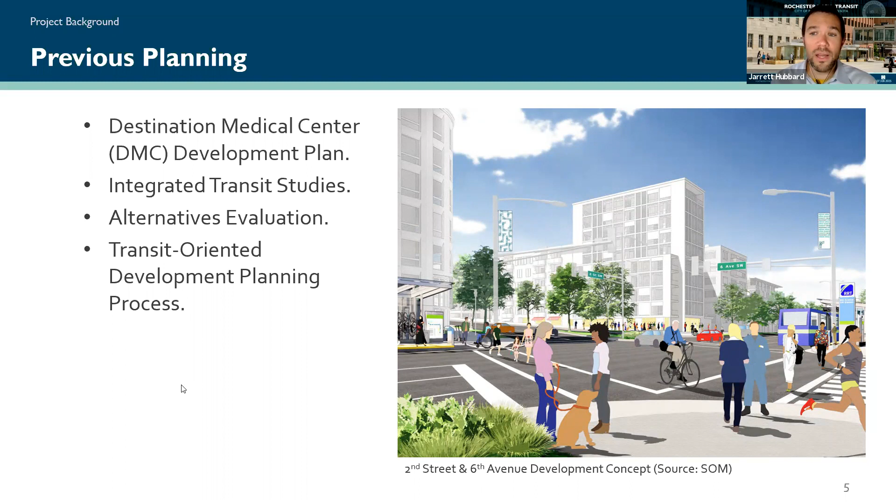With that, we'll move along to the project background. As I've already stated a little bit, Rochester Downtown Rapid Transit, or what was formerly known as the Circulator, has been a concept discussed within the community for almost a decade now. But it wasn't until the Destination Medical Center Development Plan in 2015 that the concept really started to grow and develop into a real idea, a real concept. With that plan, the city and Destination Medical Center started the process of really looking into the project and the idea. And in the last few years, we've done several additional studies and outreach, as you can see there on the screen, that led us to this point of bus rapid transit.

Some of you might be asking: these numbers were prepared a few years ago when we were showing growth and development in the community. Has the project and the city started to take a look at revising these numbers for the current pandemic we're going through and the resulting economic downturn? The answer is yes. We are closely monitoring the situation. We have open communications between the city and many of the downtown employers about what the future may hold. At the same time, we are closely monitoring not only effects in Rochester transit, but effects across the world on transit with the pandemic. So we are closely monitoring those ideas. I can say some of our transit numbers have started to rebound slightly since March, but they're still not what they were, say, this time last year.

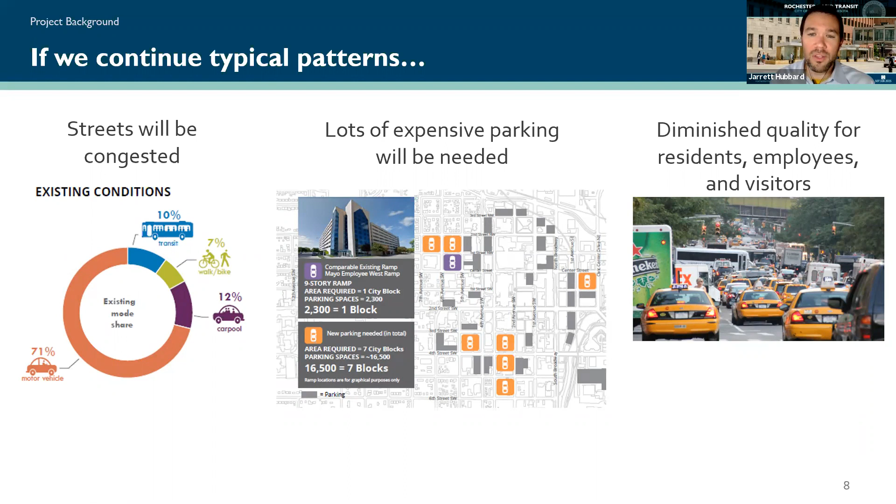And then finally, with all those additional employees and residents downtown, the streets themselves—we only have a select number of streets that come downtown, and we cannot expand those streets or add additional lanes. So it's going to be tough with all those additional people if we don't try to figure out alternatives to everyone continuing to drive their own personal car downtown.

That has resulted in what's known as the downtown, or the city's, mode share target. Back in 2015, roughly 70% of people coming downtown were using their own personal vehicles, and only about 10% were on transit. The goal is by 2035, 2040, we would adjust these numbers and grow the number of people using transit to come downtown up to, if not near, 30%. Besides growing transit, we also hope to grow walking, biking, carpooling, and ride sharing to help minimize and reduce the number of cars coming to downtown.

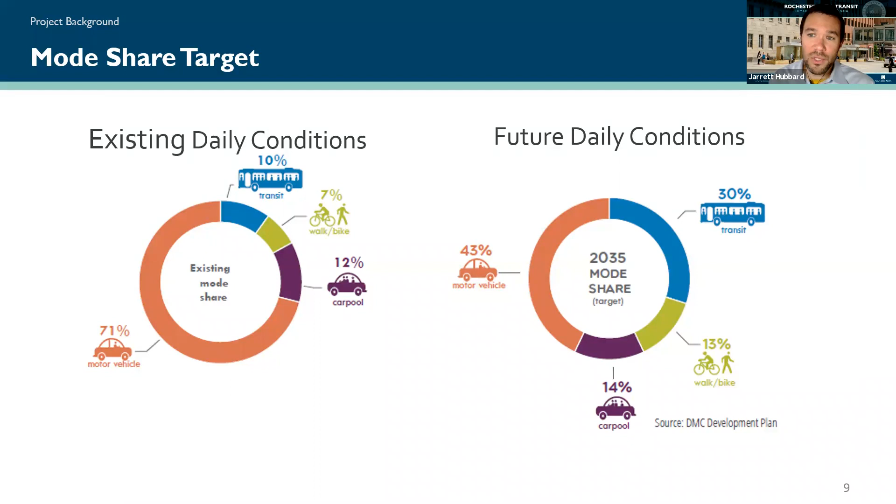So the purpose, one big overall goal, is we want to provide high quality downtown transportation for residents, commuters, businesses, patients, students, and all visitors. We want to support the economic and livability goals of the city and Destination Medical Center. And as you just saw with the mode shift and the targets, increase the number of people riding transit and not utilizing their own vehicles coming downtown.

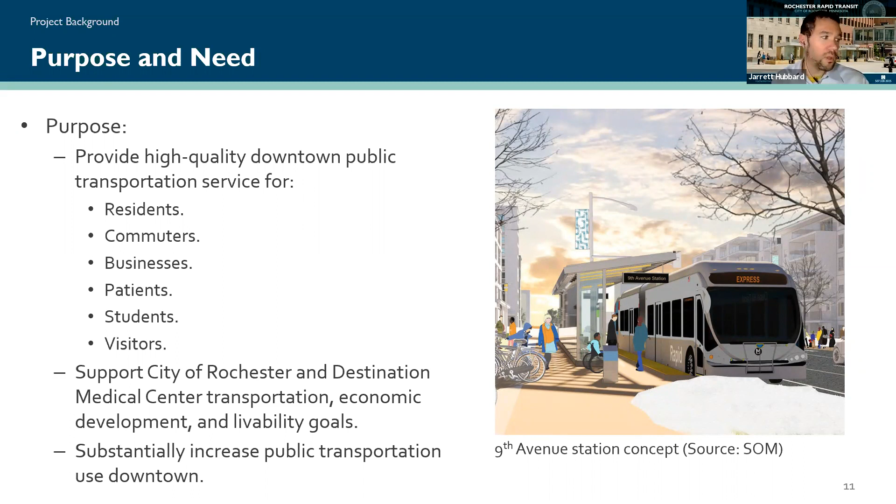So why do we need this? Once again, this repeats that local and regional travel is associated with trying to grow the goals, to accommodate those goals of the DMC development plan. We want to enhance the network and the economic development priorities of downtown. We want to mitigate the congestion ideas and concepts growing in downtown that we talked about earlier, and once again, increase transit capacity for the overall network.

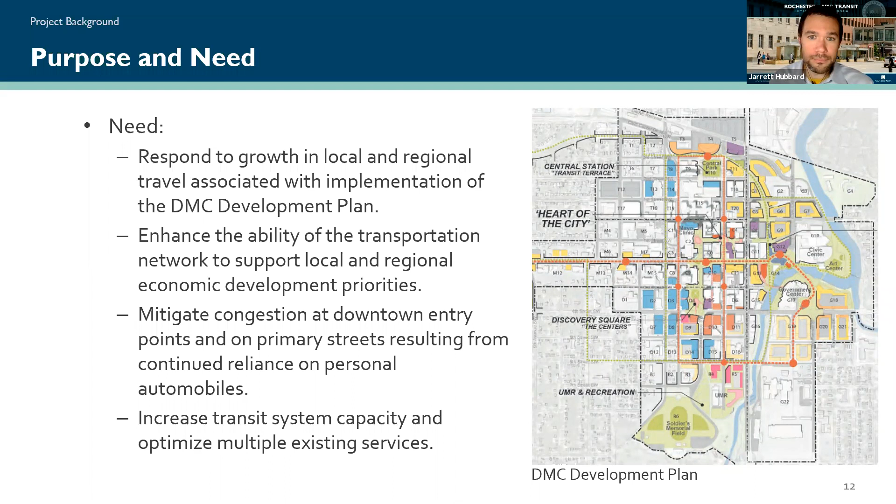More goals: increase transit use among residents, employees, and visitors. We want to use transit to catalyze the existing and future development in downtown to help support the livability and economic goals we previously discussed. We want to plan a cost-effective transit way to help make sure we can move that many people quickly, and finally support the sustainability and active living goals that the community has as well.

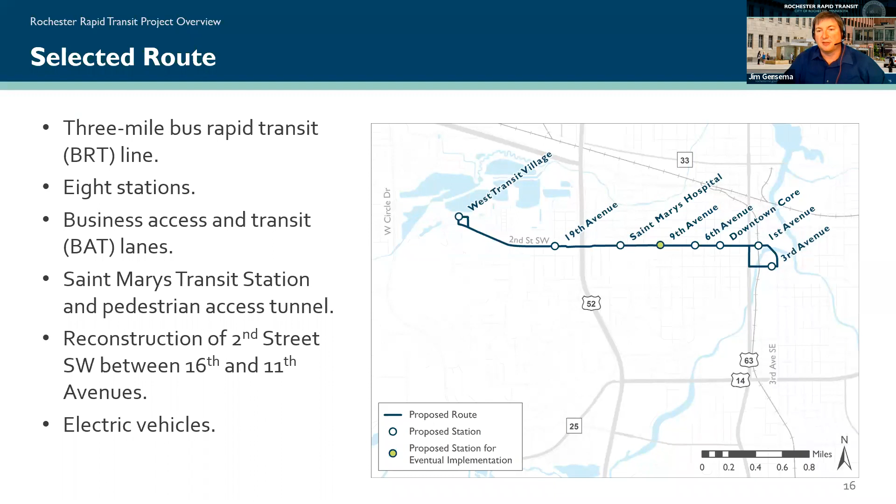This project also will complete that reconstruction of 2nd Street, with that section between 16th and 11th Avenues. And the rapid transit project will include use of electric buses as part of that fleet for this service.

By the numbers, the rapid transit project will operate every 5 minutes in the peak hours. That'd be in the morning between 6 and 9, and in the afternoon between 3 and 6. Outside of those hours, it'll be operating every 10 minutes.

With that type of frequency, you don't need to look at your schedule and route map. When you're using this type of service, you can watch the platform and know that very quickly a bus will be there. It takes less than 15 minutes to get from one end of the route to the other, so 15 minutes between West Transit Village and the government center.

We anticipate that on the opening day, opening year service will have roughly 11,000 transit riders a day. This will operate during the weekdays between 5 in the morning and 11 at night, and on the weekends between 8 in the morning and 11 at night.

One of the benefits of BRT and the proposed BAT lanes is that it provides the opportunity for those higher occupancy buses to get through the corridor more efficiently. That provides more capacity in the existing corridor, enhanced movement through the corridor for more people, and provides more options for people that might not have a personal vehicle. This also allows parts of downtown that might be surface parking today to transition into higher density uses to facilitate that growth in downtown.

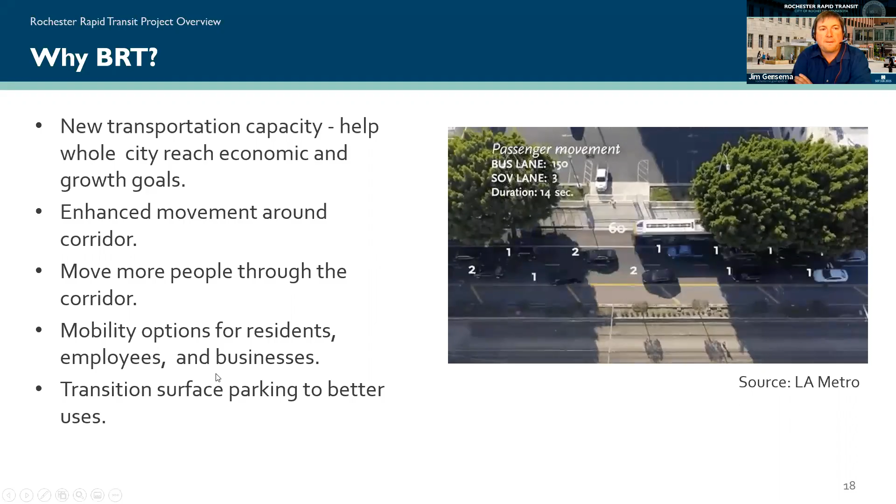So a little bit more about what bus rapid transit is, or BRT. This is a high quality service that's very similar to light rail transit or modern streetcar. It operates its own facility, in this case that BAT lane. It has that high frequency, either every 5 minutes or every 10 minutes, so you have that sense of reliability that's going to be there.

The stations that'll be placed in the corridor are more than just bus stops, more than a sign in the ground. These are established locations with a lot of amenities. This is the right size solution for this project. The buses being looked at are 60 feet long. They have the capacity to handle that anticipated ridership with the type of frequency we're talking about, and can be implemented less costly than other types of rail service.

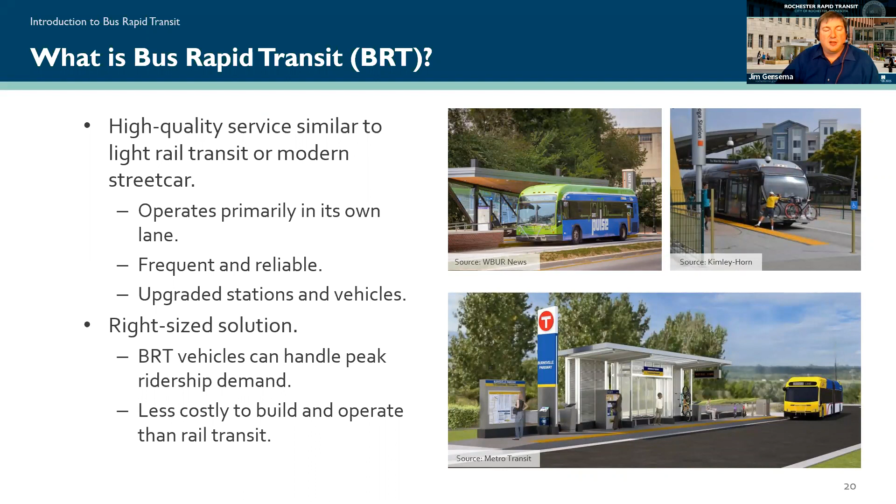These buses can operate in the existing lanes, existing pavement that's out there today. The stations and amenities contain, in our situation, a shelter that's going to have a roof over the head. They're going to be well lit, with options for fare collection on the platform, so you don't have to pay your fare on the bus and can board more quickly. It's going to provide additional rider information, seating and bicycle parking, and a warning strip along the curb so you understand where the edge of the platform is and where that bus will be boarding.

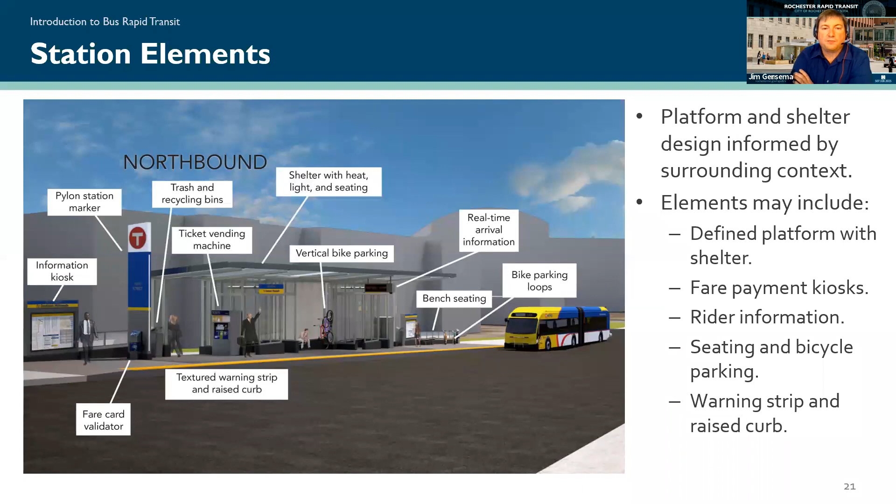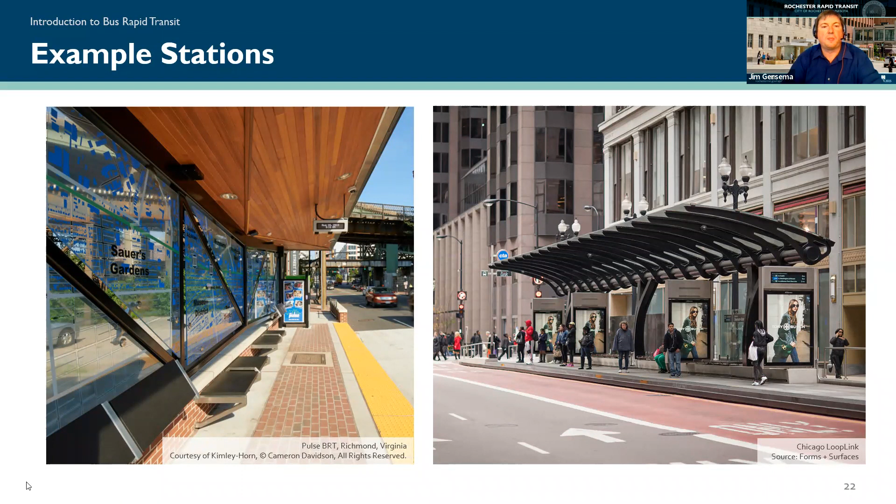Within the corridor, there are some parameters we're looking at, being that we are looking to operate this within the existing right-of-way and the constraints of how the corridor looks today. We're looking to meet standards for pedestrians and multimodal features, maintain business and resident access, and incorporate streetscape elements into the corridor where appropriate.

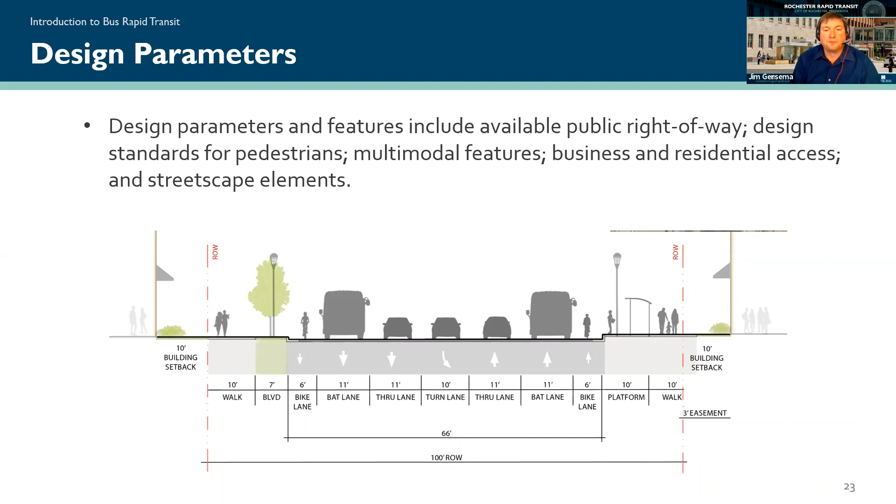Hi, as a person with multiple sclerosis, though I'm not currently using a wheelchair, I do use walkers and other things. I noticed on the Chicago slide there didn't seem to be any place for wheelchair seating to be in and covered. On the left-hand slide, I wasn't sure if those fixed down benches and some flipped up looking benches were intended for wheelchairs. I was downtown at the bus stops across from the Mayo Clinic not too long ago and was measuring them, and they don't fit wheelchairs in them. So are you considering that aspect of the bus shelters? And are you going to use solar to heat it or what?

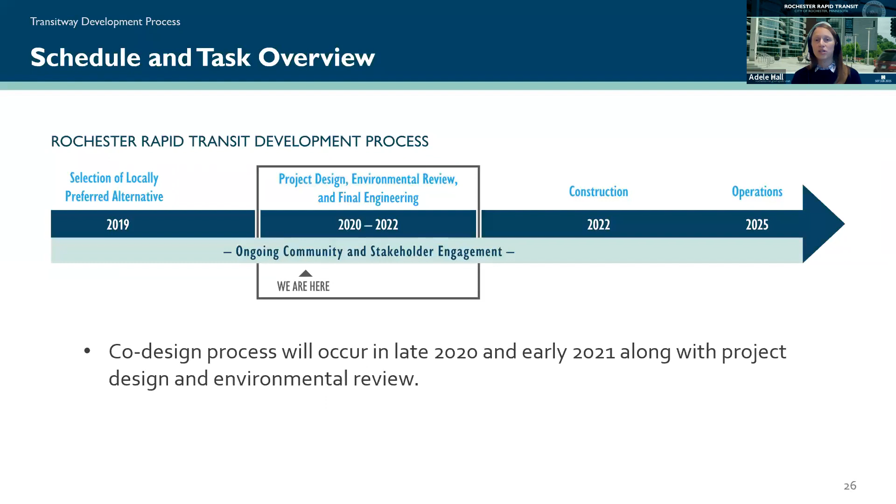There's a note on this slide about the co-design process—I'll get into that in more detail on the coming slides. That timeline highlighted design and environmental review, and we wanted to pull apart those two efforts to let you know what to expect within each.

Does it include indoor climate-controlled space? Does it include semi-enclosed space? What are the real-time signage features? What does the fare collection system look like? Are there benches or other types of seating? Are there trash receptacles? Is there bike parking, and what does it look like? All of those are questions we are answering through the design process relative to the station platform itself.

Those are the decisions that our co-design team is really involved in. Some of you may be familiar with co-design—if not, the city recently reached out and solicited applications from Rochester residents who are interested in being involved in the rapid transit project and connected in their communities, asking them to join the project team over the course of the next 9 or so months through next spring, and get involved in the decisions that shape the station architecture and design.

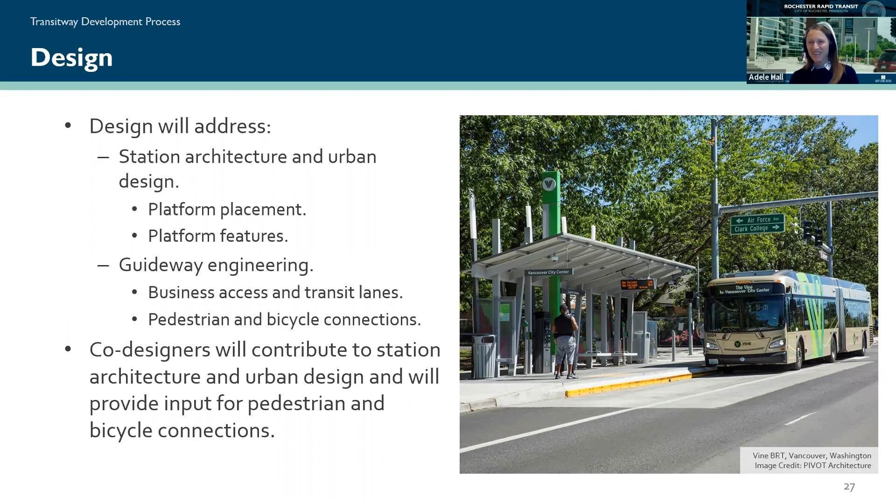All of that builds up to a definition of the rapid transit project. And when we have that definition, which we're aiming for near the end of this year, then we conduct an environmental analysis on that project. The environmental analysis does a couple of things. It complies with federal and state environmental law for the project.

That's important, but maybe more importantly for Rochester residents, it is the place where we take a look at how the project affects all sorts of aspects of the community, whether those are natural features such as wetlands, or built features such as neighborhoods or vehicular traffic. This is where we look at the impacts the project has on these various resources in Rochester. Are any of those negative impacts? And if they are, how can the project adjust to avoid or mitigate those impacts?

So we will go through that exercise starting roughly in 2021, and should have information to share probably later in fall of 2021 about that effort.

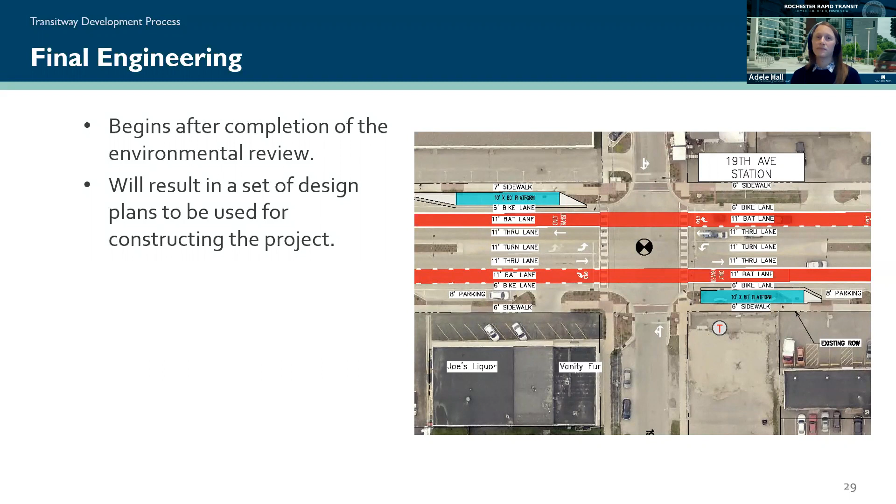I keep faking you out, Alicia, don't I, on the slide changes? Sorry about that.

So throughout these design and engagement efforts, over the next couple of years, there will be a lot of opportunities to get involved in the project in one way or another. Our goal with community engagement on this project is to make it accessible.

We know this is a diverse project area with diversity in terms of race and ethnicity, income, languages spoken in the corridor, and also familiarity with transit. We have a lot of transit riders, and we have some people who've never ridden transit before. So we're trying to provide a lot of project information and also ask for input on some specific project decisions, where public feedback and input from residents can really affect the definition of the project and what it looks like and feels like to future riders.

Some key areas where input can affect the shape of the project are safety, environmental impacts—so the findings that we come to in that environmental document—and, of course, we talked a lot about station architecture and urban design.

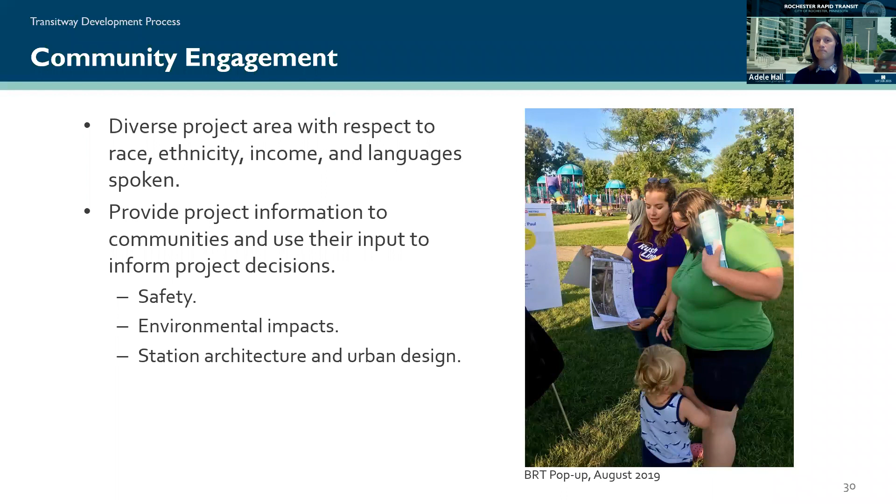So how are we going to conduct community engagement over these next couple of years? Right now we're sticking to virtual methods because of COVID, but in non-pandemic times we like to get out and talk to people in person. We like to do that in forums that we as project staff host, asking people to come to us, but we also really like to show up to places where people already are.

We like to be present at community events or pop up in a grocery store and just try to catch people on their way to and from, in the course of their normal day, in case this project will affect them and they're interested in it and might not otherwise see the information. For now, though, we're trying to replicate those in-person methods as much as we can virtually.

So if you've been to the Rochester Rapid Transit webpage lately on the city's page, you'll see we've added a lot of project information there, a lot more detail on the project. We are doing regular posts on social media, especially when we have events like this webinar coming up, trying to promote those. We have a few surveys on tap around those big project decisions, and we'll also be doing a couple of informational videos about key aspects of the project.